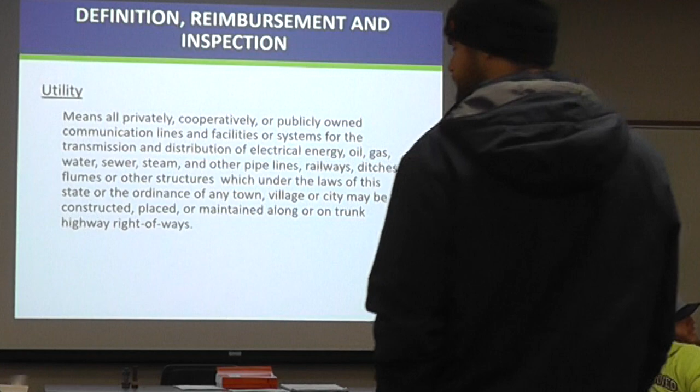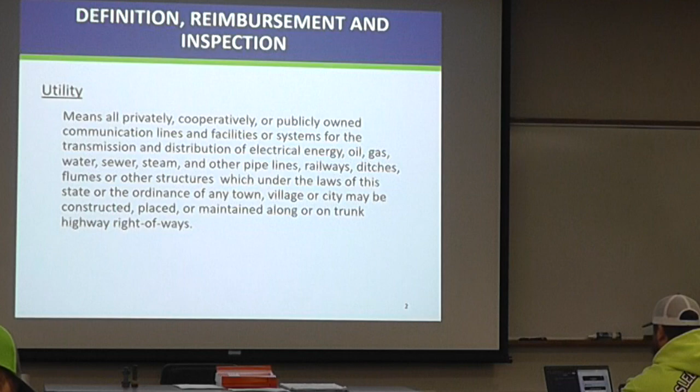But it can carry all kinds of stuff, and it can mean private, cooperatively owned, or public. It can be communication lines, and piping for oil, gas, or water, all kinds of stuff. Sometimes utilities are carried on bridges, especially when you get into electronic things, the conduits for lighting and things like that. So we will be talking about how you put utilities in and what we have to do to accommodate utilities.

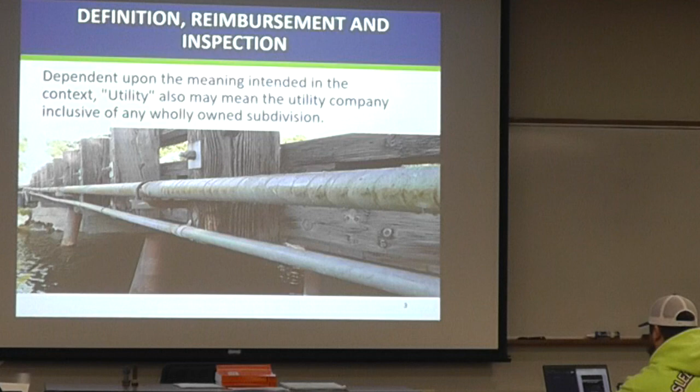So the definitions might be dependent a little bit on what the context is. It might be utility company and whatever. But again, it's something that's transmitting across, in our case, a bridge.

So 1507 in the spec book talks about utility, property, and service. Page 41 of the smaller spec book, the one that has division 1 and division 3. So that's where we find it, page 41, utility, property, and service.

So we are inspectors and/or engineers on projects, and we have certain responsibilities, and that's what this is saying. We want to assure that the plans are properly provided for the utility, or things that are on our bridge properly put in, and all the parties understand what's going on.

We want to make sure operations are coordinated. And if we, as the owner, happen to be paying for it, we want to make sure that the work is done and paying accordingly.

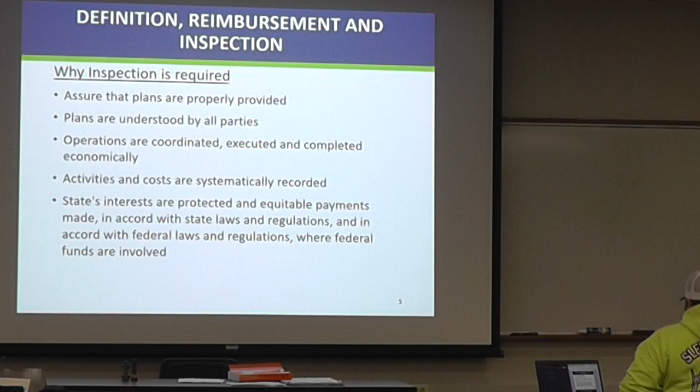Sometimes it's the utility's responsibility, and so we really don't have to track what they're doing. Certainly want to make sure that things are done accurately. And so we're just making sure the state's interests are protected, equitable payments, and so forth.

So there's a statement here, the state can't pay for any costs which the federal government will not reimburse the state. So just want to make sure of what the responsibilities are, who's going to pay for what.

And so thus it's required that the state and utility agree in writing on their responsibility. That's called the utility agreement. And it should have a detailed estimate of costs, detailed plans, and specifications. This stuff hopefully will be all done before our project.

Unfortunately, it doesn't always happen, and we'll talk a little bit about that. But the agreements are written between the state and the utility, in every case where reimbursement is involved. And the representatives of each party understand their scope and what they're doing.

And so down at the bottom here, you as the inspector, you as the engineer, will want to know what are any utility agreements.

So the utility companies are responsible to relocate so that we can build our project. And utility companies may be held responsible for damage incurred by the contractor. So there's many instances, I'm sure all of you have worked in the field, you've come across times when utilities can't get approved, and all of a sudden there's a delay.

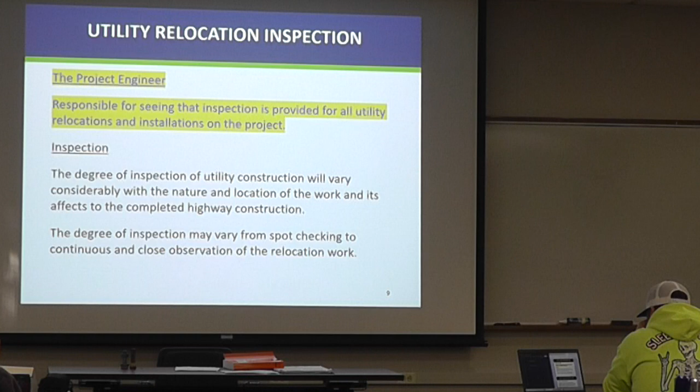When something is on a bridge and we're constructing it, like a conduit and a rail, or a conduit and a deck, we want to make sure that's part of the contract when we're putting a new utility on there. But the utility relocates and deals with it.

When we have a relocate, the utility agreements unit for MnDOT aims to get that agreement done so we can move ahead. As I mentioned, that's not always done properly and we need to work through it. You as inspectors should verify the info in those utility agreements and in the plans as to the condition of existing utilities before any relocation work.

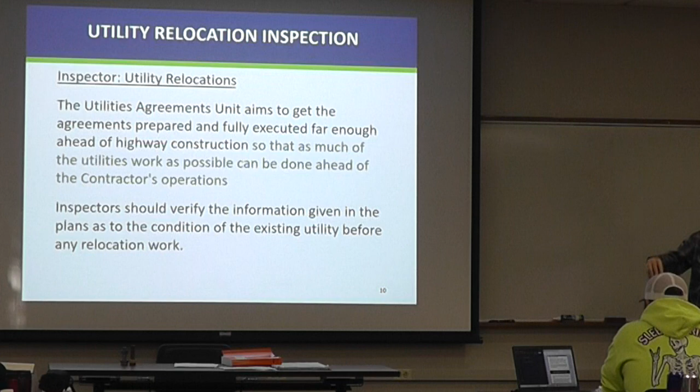Sometimes we do our best effort to locate utilities, and they're located with a certain amount of precision - usually type A, B, C, or D, with D being the lowest, meaning they don't know exactly where the utility is, but it's somewhere in the vicinity, and the contractor has to verify. So the final inspection should be documented.

It's the utility inspector's duty to see that the utility carries out its relocation requirements as agreed. If the work and materials involve something like a public utility force main - for instance on the Wakota project, we had a 42-inch force main running right by one of our footings.

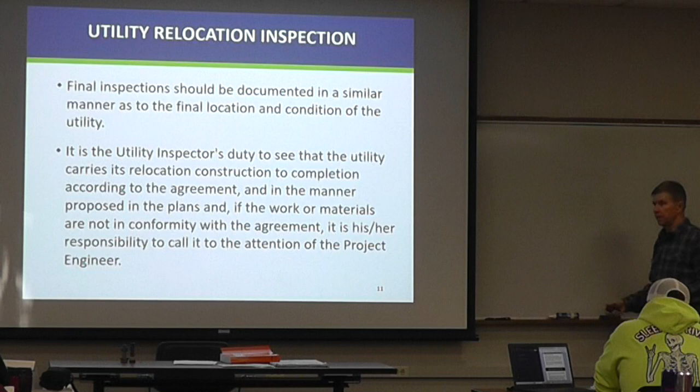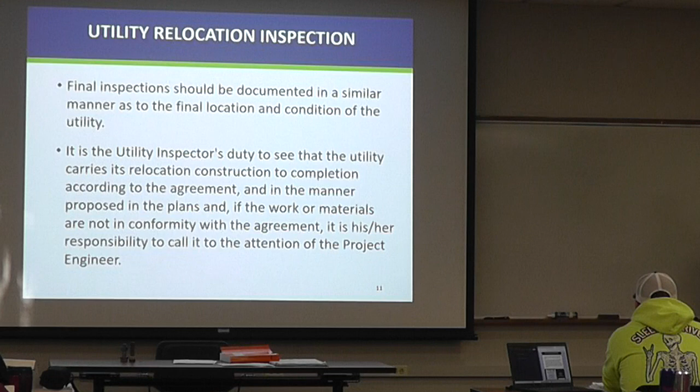We actually had to temporarily relocate that so we could build one of the footings. It was an old thing, there were cracks in it, not in the greatest shape, but it took a lot of effort just to build a bypass. It's a sanitary force main, 42 inches in diameter, critical for all of South St. Paul, coming to the Pig's Eye treatment plant. It was important that we did things right, to not damage the pipe as we tapped into it, and then later pushed it back into the original.

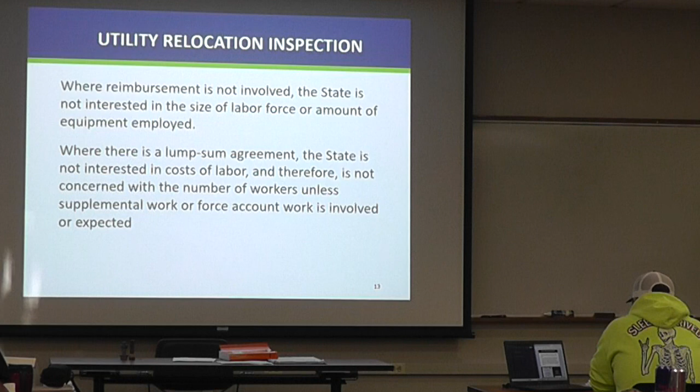If there's no reimbursement, the state really isn't interested in the size of the labor force or the amount of equipment employed - the utility is taking care of it, so we don't have to track it. And if it's a lump sum, we're also not interested in the specifics of how many people, what was their pay rate, and so on.

So, delays - the project engineer has to take reasonable steps to see that the utility coordinates so we don't delay. That happens, we have delays, and we need to make sure we document. If there's delays, make sure you as an inspector document, you as an engineer document it, so that when it comes to the end of the project, we avoid battles over how many working days we have to add and so forth.

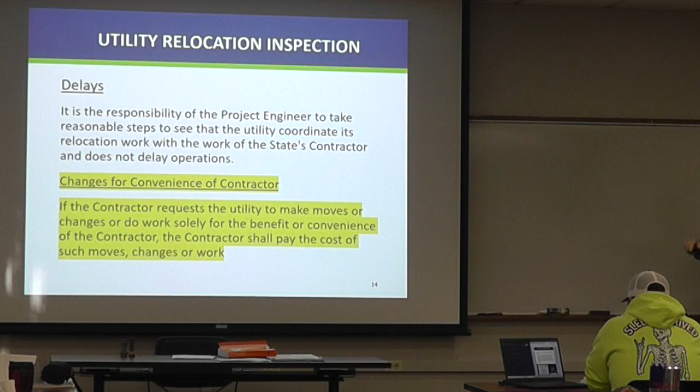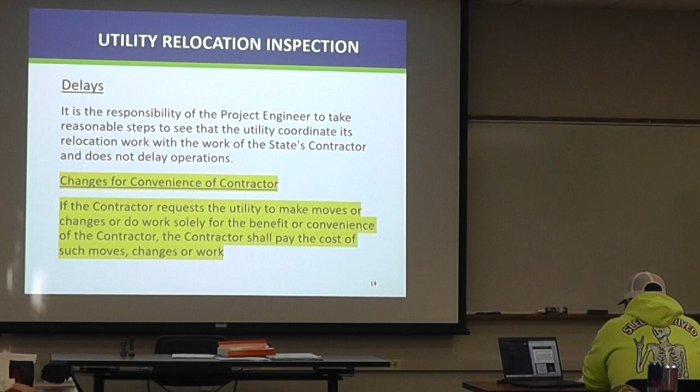The contractor can, for their convenience, make changes. They can say, rather than working under this power line that has relatively low clearance, I'm going to have them de-energize it while I'm working in the area, or I'm going to have the utility move it so I can work more safely. But if it's for their benefit or convenience, the contractor shall pay the cost of those moves. Those are all things in the specs that make sense - they bid on it knowing they can build with 30 feet of clearance to the power line, but it'd be easier and safer if they relocate or de-energize it.

So you as the inspector should be involved in all kinds of different things, including the pre-construction conference, the permits and agreements - have copies of all of that stuff. And the relocation work is eligible - if it's eligible, don't start until all the agreements are signed.

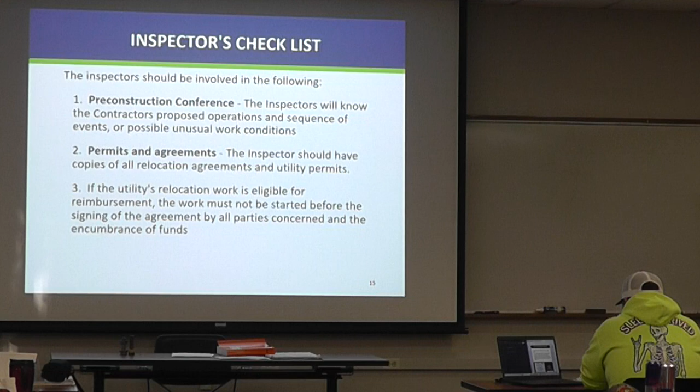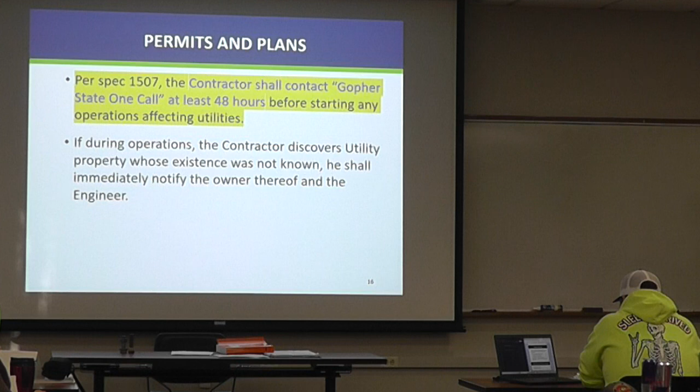Per 1507, the contractor shall contact Gopher State One Call at least 48 hours before starting operations. We don't want the contractor to delay the things that are going on. 1507.2, page 42 of the spec book, covers the notifications and things required by the contractor. If they discover something whose presence was not previously known, they shall immediately notify the owner.

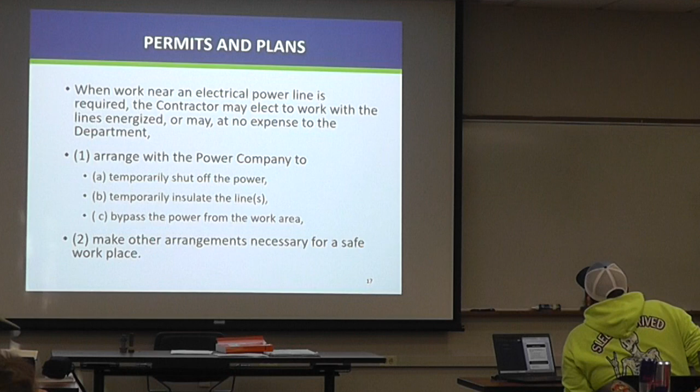If work is near an electrical power line, the contractor may elect to work with lines energized, or at no expense to the department may temporarily shut off, insulate, or bypass the area, or make other arrangements. Again, those are at the contractor's cost in that work area.

So a question on our plans here: what utilities are to be built on our bridge 27138, and where might we find that information? Who has a thought, who sees anything? I see you, you see electrical, huh? Yeah, you remember seeing the electrical. Okay, so there's some electrical in there somewhere.

Conduit, with some drainage maybe. Drainage system, D910, we'll talk about that a little bit. How about the pay item list on 1A, at the bottom? The conduit system type 1 and 2, page 1A.

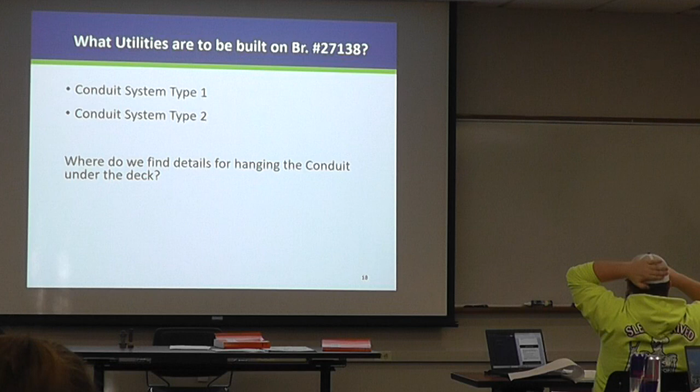So we see some things: conduit system type 1, conduit system type 2. Where do you find details for hanging the conduit under the deck? Page 35 had that little detail, and it showed the little anchorages. So, conduit support assembly, kind of in the upper right of sheet 35.

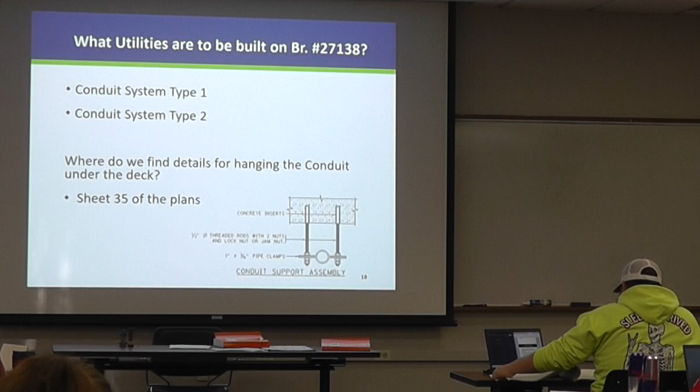So we see that there are some things going on. How about on the north abutment? Is there any utilities that are to be built on that abutment? As we're constructing the abutment, is there anything we need to build? So, north abutment.

Specifically, can you find any conduits for lighting and where do they get placed? Also, how about any access through the back wall? And we got a page we're starting to see, page 16. So what do we see in there? Anyone can describe, or maybe some notes or something.

Note 4: centerline 6-inch conduit sleeve for future use, to be capped. Where is that? There's one right in the middle, going vertical - is that the one you're saying? Mm-hmm. So down in the elevation, right in the middle, right near one of the construction joints. It goes through horizontally right above the footing.

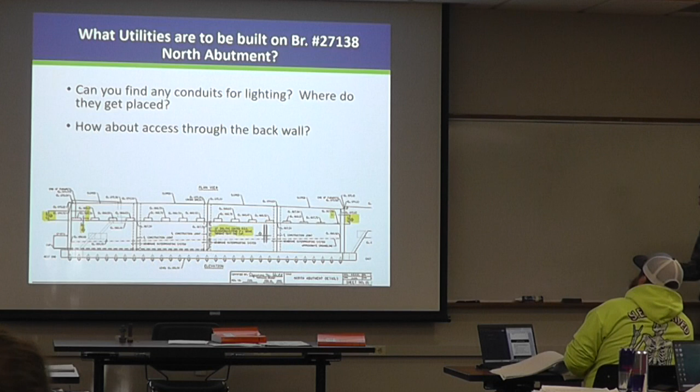Okay, so we're seeing some things in there. There's note 4, there's also note 6: centerline opening for 2-inch diameter conduit signals. We'll highlight some things that are in there. I think we've kind of identified some of them. This note 6, I think, is giving a dimension to this pipe.

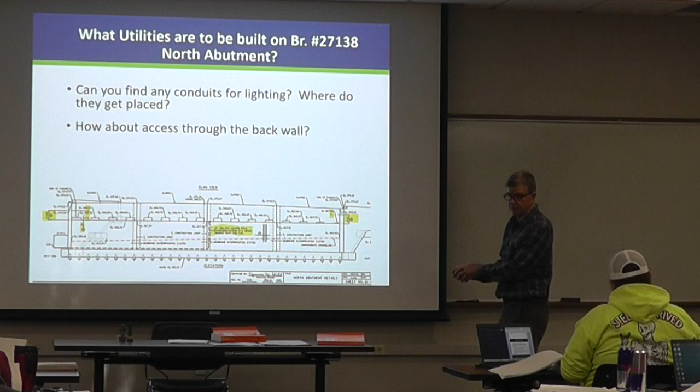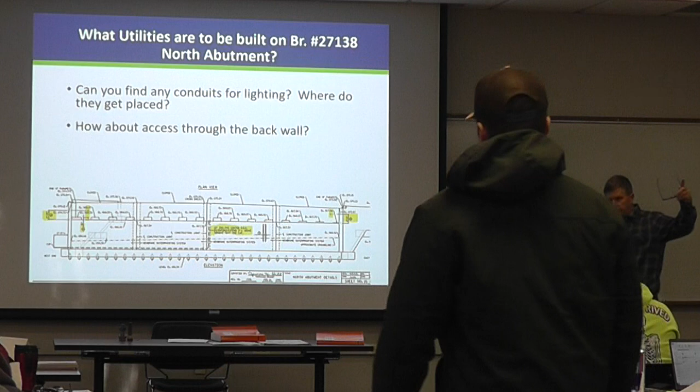So it's going through a back wall. As we're building the back wall, we want to make sure we put that in there, because the abutment is built way before any of the conduits are installed. If we don't put that in, we're going to have to core it through. That happened on St. Croix - we had an end diaphragm, probably 3 foot thick, and they forgot a utility conduit, and they had to core through it.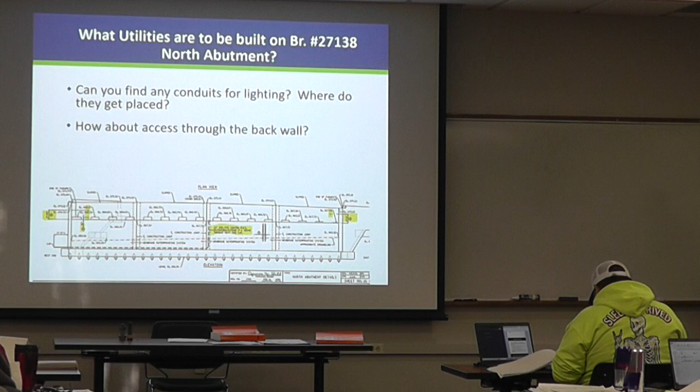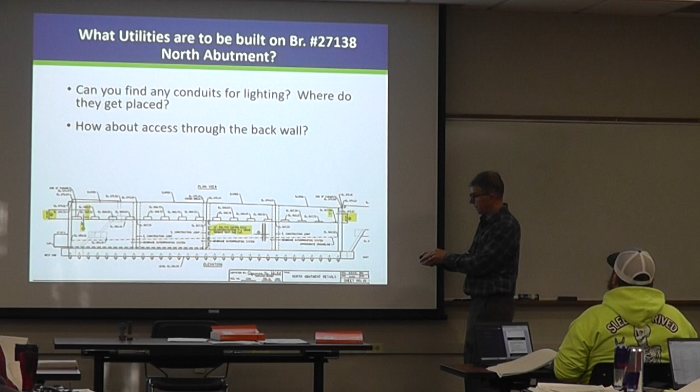That took a better part of a day probably to core through that. Okay, then we have this little one coming down vertically, and going across horizontally. It's capped, but this would be for lighting, to put some underdeck lighting in that zone as well. So that means we do have conduits, and I think we will show that B910 piece down here as well.

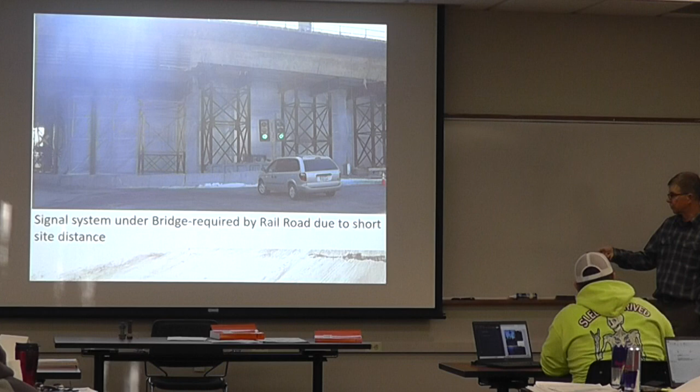Power lines - look up and be safe. This is a signal, temporary, and this is actually right near what I was talking about, the 42-inch sanitary. It was at this pier that the force main was running pretty close to it. But this is on the Lafayette project.

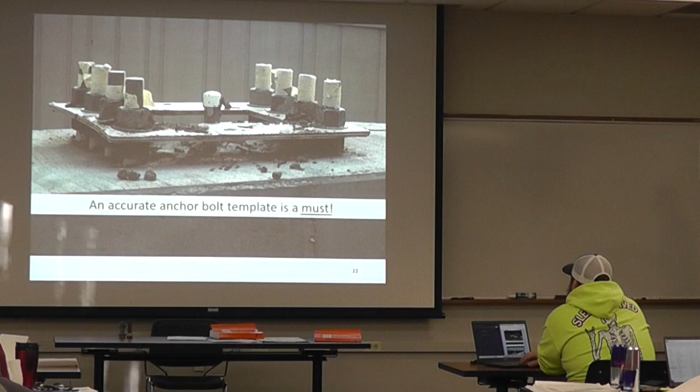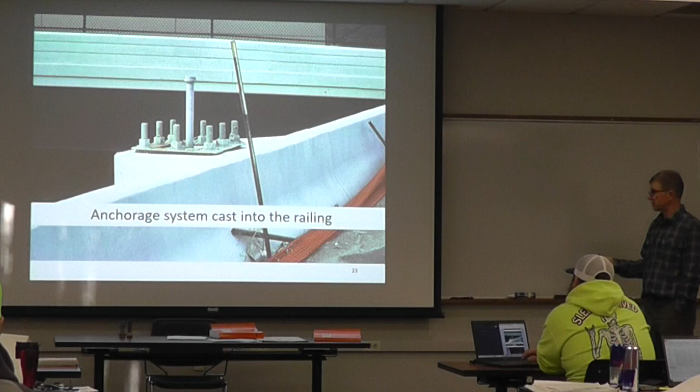A lot of times we might have some type of overhead sign on a bridge, or bigger overhead lights or something. This is a pretty big bolt template. If we have something like that, we want a template just to make sure things stay in the correct orientation - there's anchorage cast into the railing. So this is similar to our 6-inch future sleeve on our plan, just much bigger.

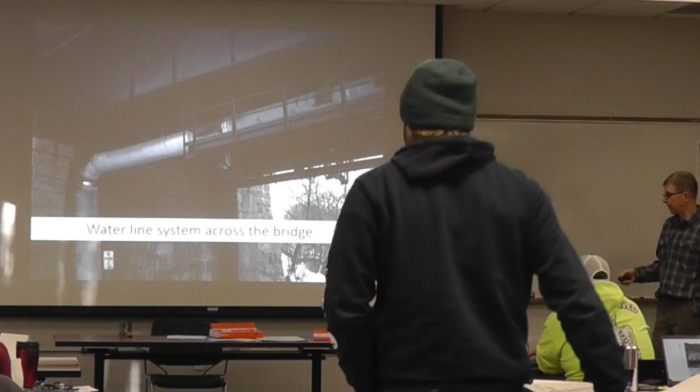Here's a water line going across the bridge. I haven't seen many of those recently, but I have seen some of the old bridges with water lines.

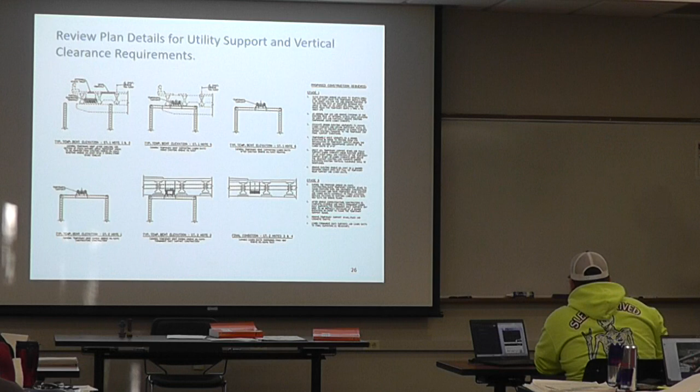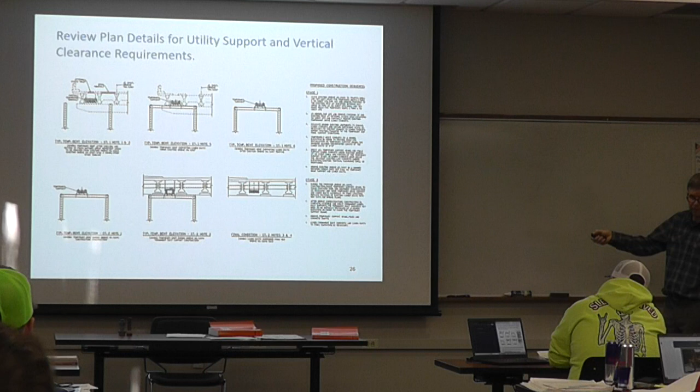I won't be able to read all of this, but in essence, the plan details showed that we need to maintain whatever that vertical clearance was. This submittal said, temporarily hoist the conduits to a higher elevation to provide room for installation of a temporary support beam.

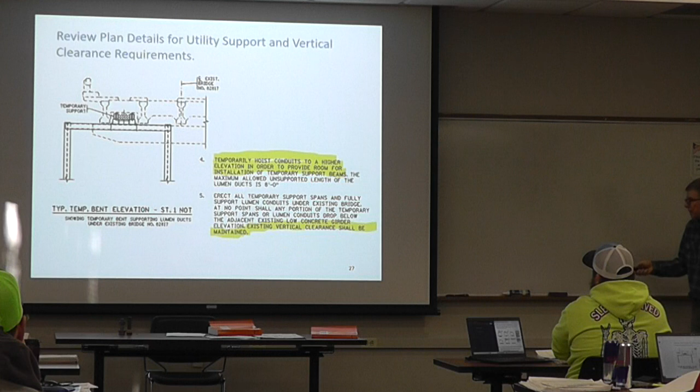And so that is something that was required. The contractor said, well, do I really need to do that? It was going to be a several week process, maybe even 3 months or something. So MnDOT said, no, absolutely not. We're not going to restrict the clearance on the 694. 694 is underneath, so it has to make that work.

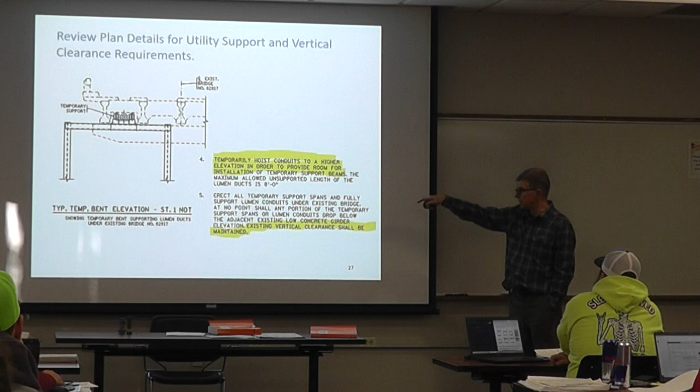So be aware of the notes that you have. This is that bridge.

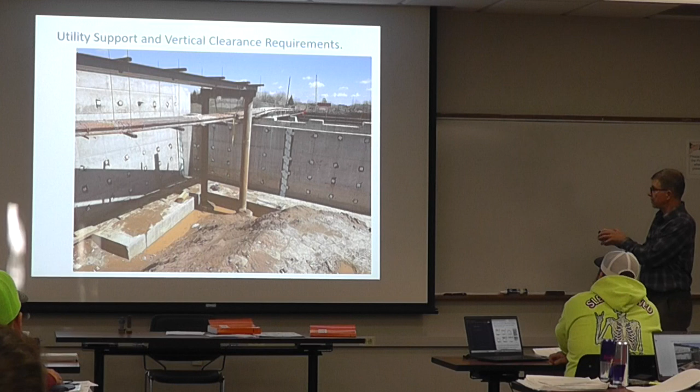And so supporting that utility bank, it's going to later be hung underneath the deck of this bridge. But we see how it actually goes up so that the support beams could be installed. Ultimately, they didn't like the plan, but they were trying to ask if we could do it some other way.

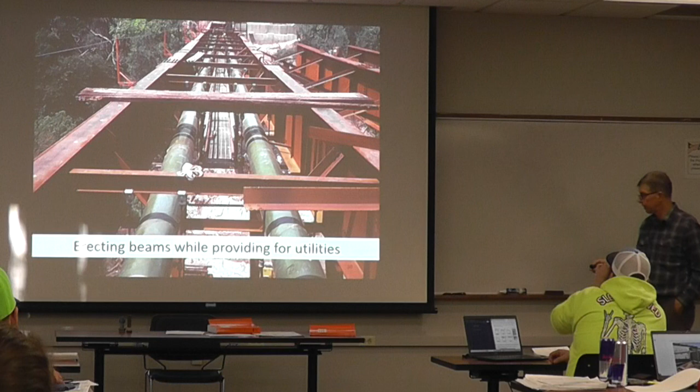Sometimes there's temporary supports needed here for utilities as we're redecking or something like that. Services sometimes need to be maintained. Some older pictures here of some of that.

Anytime we have conduits, we want to make sure that there are expansion devices in place. If you don't provide adequate expansion, this is what can happen. You'll start to separate your conduits.

Just be aware of that, especially the difference in materials. A lot of times the contractors now would want to use the fiberglass type of conduits, but it has a different coefficient of expansion and it'll shrink more than the concrete, so it could have some issues.

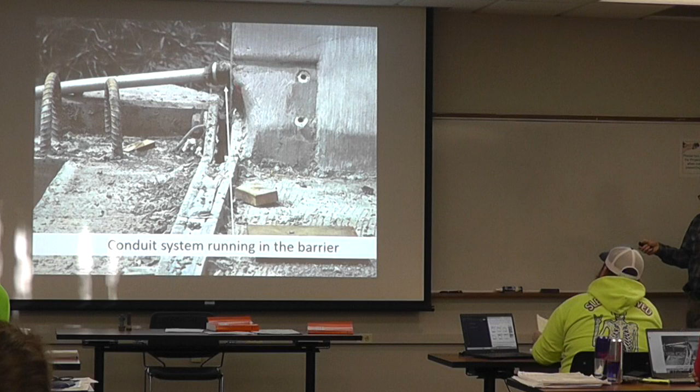Here's a conduit system running in the barrier. This is very common, and these are called expansion deflection fittings. Part of the reason is to provide expansion when the bridge moves longitudinally, but it's also deflection, so that if we ever want to jack this bridge deck and replace the bearings or do something, it can also accommodate the movement vertically.

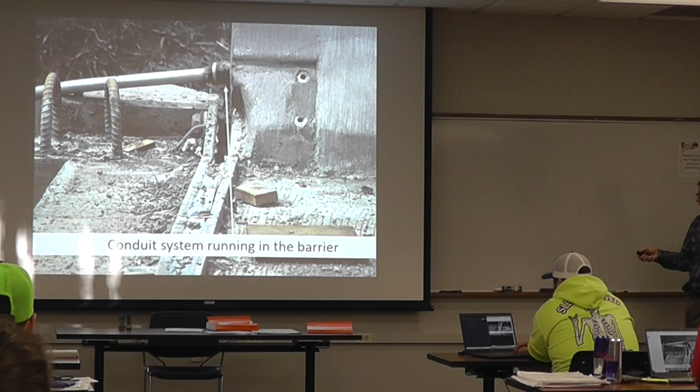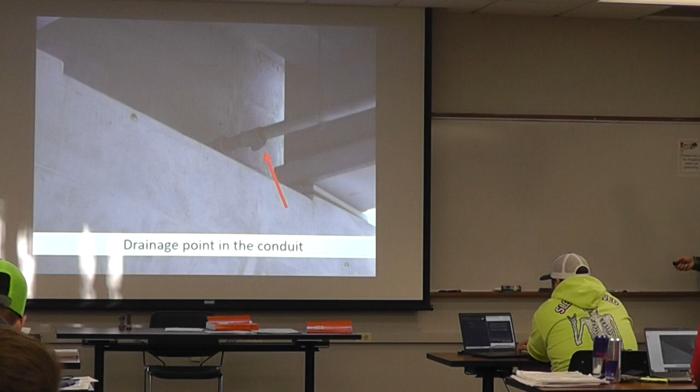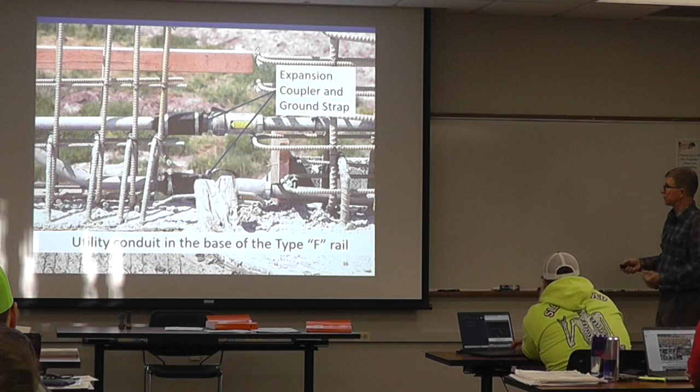Quite common. We also need to ground things, so there are ground straps that go across. Here is a picture of the utility conduits going through an abutment back wall. Again, form that in - if you don't, you're going to have to core. So that's something we have to consider.

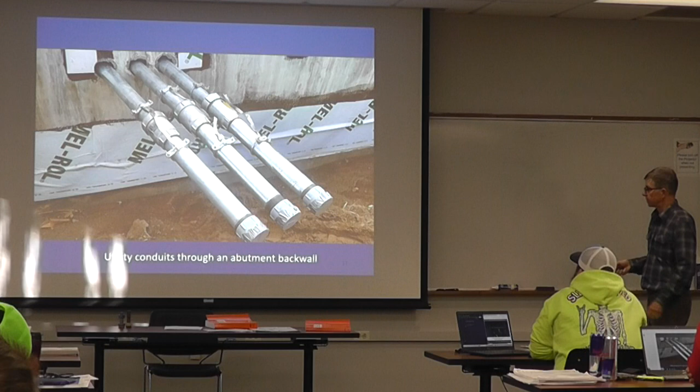Lighting system. This is the bridge that Melissa was showing right near the 35W Mississippi River Bridge. But a lot of times we will have lighting to help, especially on these wider bridges - it helps give a safer feel at night.

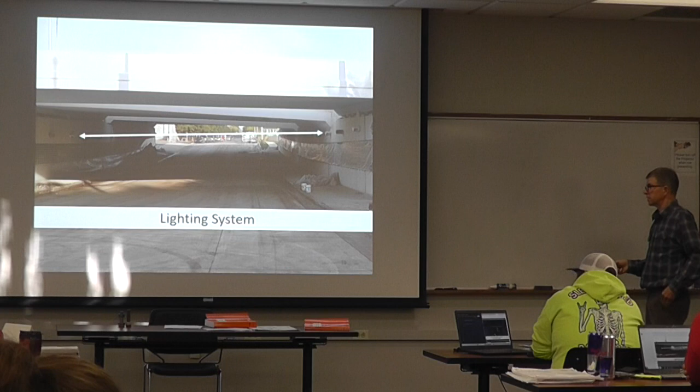Sometimes there are conduits in the deck, whether it's for some of these traffic sensors or things like that.

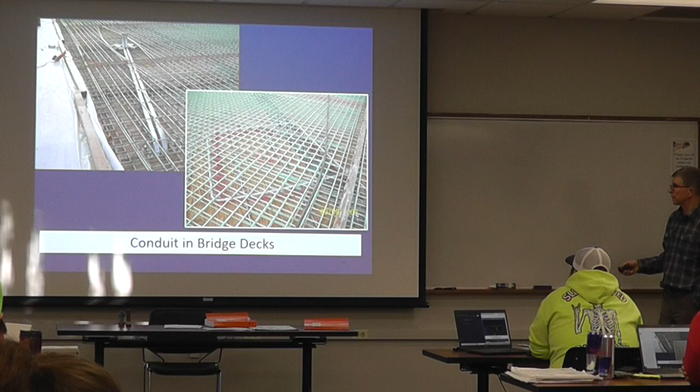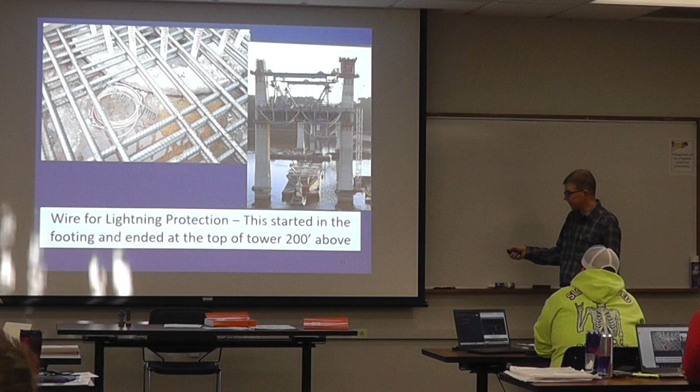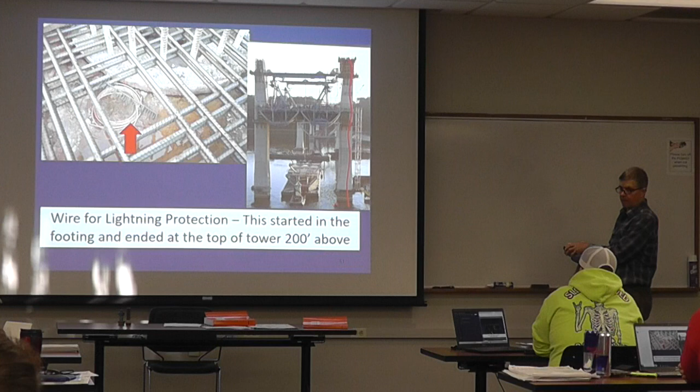Lightning protection. So on St. Croix, we had to put this - it's a pretty big cable. It was attached to the drilled shafts or the caissons that are like 20 feet below the water here. And every pour that went up - so if we'd pour 15 feet, that cable would go up. We had to remember it every time because it's all part of the lightning protection system that's up on top. Obviously if you forget that down at the bottom, now your whole lightning protection is missing. That has to be one continuous piece.

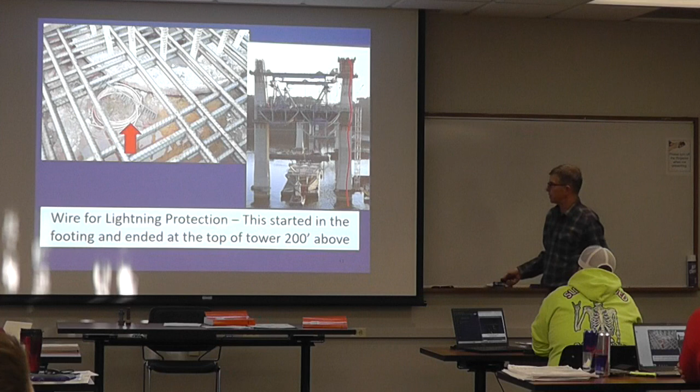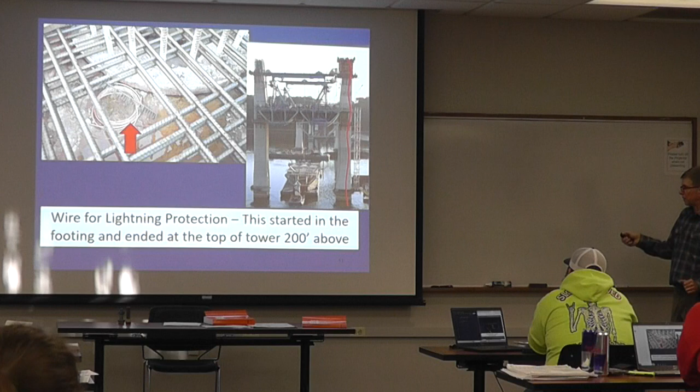They spliced it a couple times, but yeah, it was pretty long. I know that when they started it, I think they just used some type of coupler. But yeah, the tallest tower was the large one - 200 feet above the water.

Lighting on the bridge - aesthetic lighting is also something we make sure we have provisions for, wherever the lights are going to be, we need continuity. So that's just a little bit on utilities. Again, kind of a minor topic, but any questions?